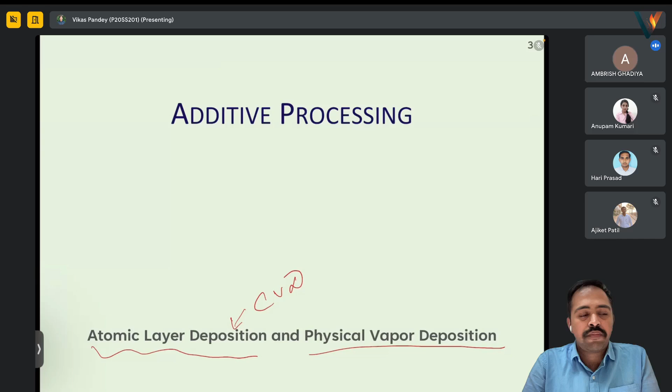Okay, yeah, I think in one of the slides we covered this part. Continue, what were the options? Let me read out. So the options were: the type of reactor used, the temperature at which the reaction is carried out, the chemical stability of the precursor, and the presence of catalytic surface within the reactor.

Yes. So my query is that the correct answer given is the temperature at which it is carried out. So if the reduction is always happening below the pyrolytic temperature, sometimes I think it always happens below the pyrolytic temperature.

So how is it dependent on temperature, because the stability is more important, right? But stability, when we are talking about CVD, we are not concerned about the stability of the chemicals. Even if a chemical is less stable, but it reacts at a certain temperature, then what will be the role of stability in that?

Stability is something we have to decide when we are choosing the precursor. But when the reaction is happening, it is asking what is the condition that will determine the reaction. The determining factor for this, whether it is reduction or pyrolysis, will depend on the activation energy. We talked about this in the previous class also, right? And activation energy in case of CVD—we said we have very limited control over the reaction in CVD, and that control is generally attained through temperature, right?

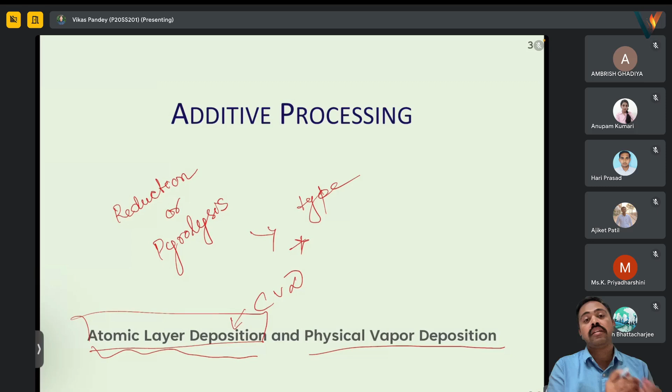That categorization is clear to everyone? Okay. So when we are talking about atomic layer deposition, if you see the equipment, it will look very much like a CVD, whenever there is temperature involved in these things. If you see the atomic layer deposition, it will look like a PVD system when you see PVD and these things, but it is CVD since reactions are taking place and then the deposition happens.

The name itself suggests that it is atomic layer deposition - that means depositing materials one atomic layer at a time. And when we are talking about atomic layer, that means it will be even lesser than a nanometer, generally in terms of angstroms, some angstroms. It is depositing one layer, one atomic layer at a time. So very precise - but as can easily be understood, if we are depositing one atomic layer by one by one, it will be very precise, very good, very smooth, conformal, but very slow.

And it operates at low temperature, unlike other CVD methods. That is why this is something quite commonly used in flexible electronics. We talked in the first class about the different kinds of substrates, and we said that plastic, PET, and these Kapton substrates have limited uses. But ALD is something where we cannot put plastic or Kapton into a furnace at 1000 or 1100 degrees Celsius - since ALD operates at a very low temperature, almost room temperature, we can even use plastic and glasses to coat them.

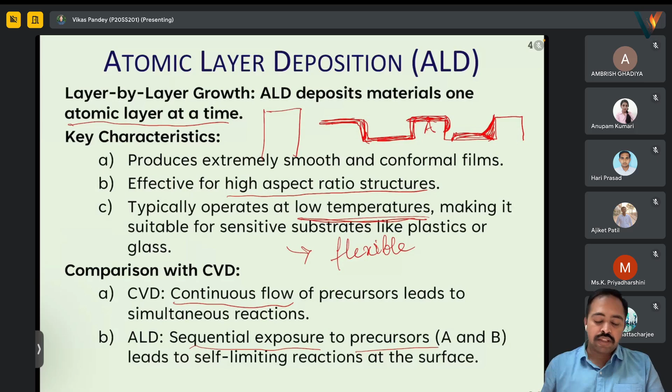Where is it typically used? It is generally used for oxides, even metals and nitrides, sulfides, and phosphides.

Since it is slow, one layer at a time, we know the atomic layer thickness. Suppose you are depositing Al2O3, you know the thickness of the Al2O3, and based on that we can very precisely calculate or know how much deposition has been done. So there is very precise control, unlike CVD where we were not able to understand the thickness, and we were not able to check it during the process. In the case of ALD, during the process itself we can check how much deposition has occurred.

Because it is very sequential, layer by layer, it is very consistent across complex surfaces. So what is the process? We have a starting surface, a clean starting surface, with some dangling bonds there.

One precursor is introduced. That precursor will bind to the dangling bonds on the surface, and then that precursor is purged out. Now we have a single layer of one reactant - that is precursor one, or reactant one. Then we put precursor two, that is reactant two. It will come, react, and then again it is purged. Now these two materials will react as per the optimal conditions we are providing, and then we purge. So one layer is formed, we leave that as it is, and then the surface is ready for the next deposition.

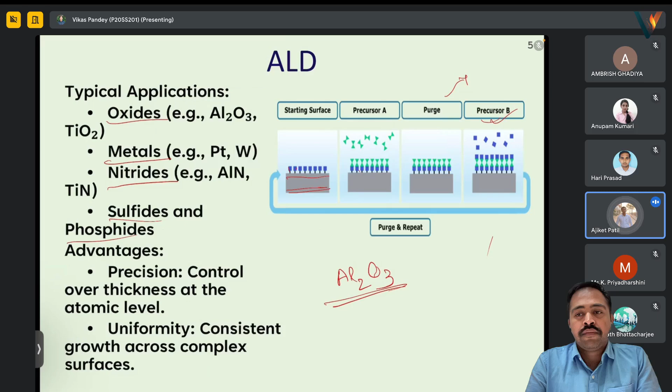Anything till here? Any questions? No, not from me. Okay, let's move forward.

The process steps are: precursor A chemisorbs. When we say chemisorb, that means it is chemically bound due to the dangling bond. You might remember from your intermediate studies what is chemisorption, what is physisorption. It is a chemical reaction based thing. It is chemisorbed onto the surface, forming a self-limiting monolayer, meaning it covers the whole surface as a monolayer, the precursor one itself.

Then excess precursor is removed. There is no reaction happening in the vicinity around it, because both of them meet only and only on the surface of the wafer that we want, nowhere else. No outside reaction is there. It is completely removed. Then precursor 2 is introduced, and that reacts with the chemisorbed A, completing the layer of the desired material. Then the extra material B is also removed, and as such we get one layer.

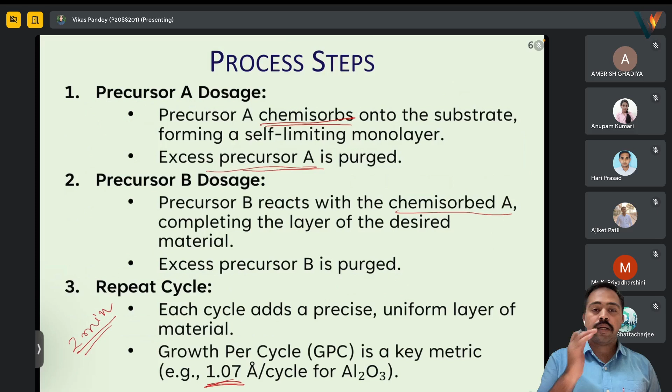Even if you compare it with other PVD depositions like thermal and sputtering, which we will be covering, even in that case this time is well enough for some good thickness, like 50, 60 at least nanometers. So this is slow, but precise.

So there are different kinds of ALD systems. The question arises, in case of CVD, what was the source of activation energy that we were using? Anyone? Temperature, right? But here we are saying it is a low temperature process.

So there must be some activation energy we must be providing for the reaction to happen, and that is through an RF plasma source in the vicinity of the wafer where deposition is to be done. The plasma being created provides the energy for this reaction to take place.

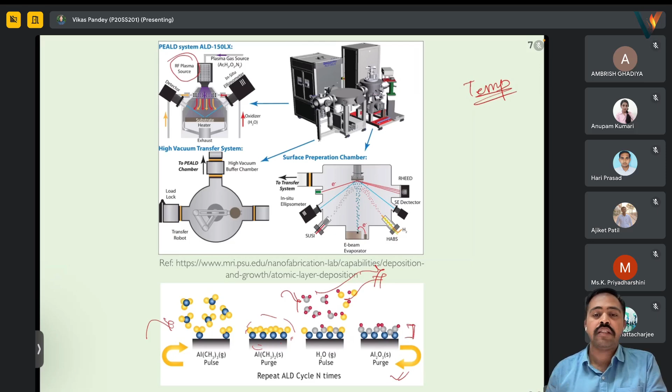Here an example of deposition of Al2O3 is shown. So Al(CH3)3 in gaseous form is inserted and it will adhere to the surface of the wafer. Then H2O is inserted after purging this, also in pulses so that complete reaction takes place. Once the complete reaction happens, along with the byproduct, the extra H2O is removed, and then we will have an Al2O3 monolayer forming on top. This is repeated multiple times to attain the number of single molecular layers we want.

So what are the things we need to optimize when working with an ALD system? One is the dose time. It is not that we put the precursor A and it gets chemisorbed at once. It must not be too short, otherwise the monolayer will not form. Also, if we put it for too long, we will be wasting time for an already slow process. So dose optimization is a very important consideration.

How long we have to put the precursor for complete chemisorption on the surface - so optimal dose is important.

Second is the purge time. If we have to remove the extra material, that time is also very critical. First, purging should be for adequate time to remove anything extra. Second problem is, if we are not removing this, what will happen? It will be like CVD - a lot of reactions will take place, and we will not get the monolayer we want, and no uniformity will be there. So both dose time and purging time are very important.

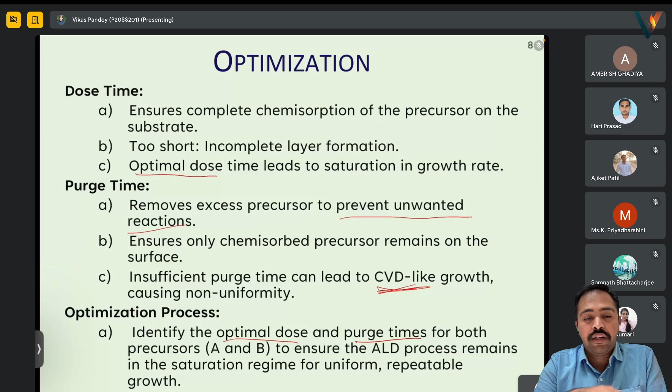So what are the advantages? This is taken from this website - they make ALD systems, so they have provided some images. You see, if it was a CVD system, the scale is actually quite low - I forgot to put the scale here, it's quite low in terms of microns, and sometimes even nano - see the coverage.

It is almost the same thickness here as what it is on the side walls, which is not possible when we are doing a CVD or PVD process in general.

It is very good in coating deep trenches and complex geometry with uniform thickness. It is independent of gas flow dynamics, so we don't have to consider whether it's turbulent, Reynolds number and everything. It is very ideal for precise thickness control and coverage, such as semiconductor devices and coating on 3D structures, like MEMS structures.

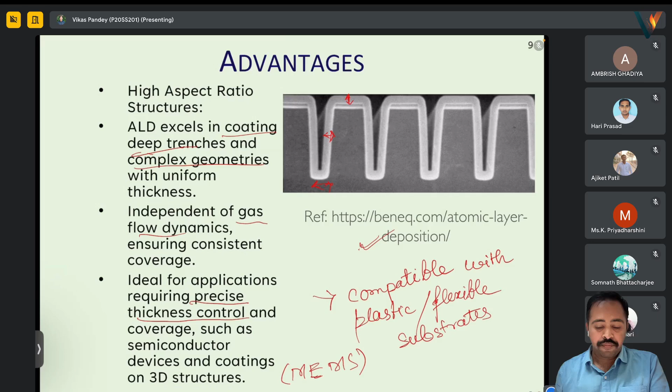Then there is one more factor that can affect our deposition, that is temperature effect. Although it is a low temperature process, meaning we are not going to very high temperatures, temperature will certainly have an effect, since it is one of the factors that facilitates the reaction. So if this whole process is done at a very low temperature, lower than the optimal temperature at which this will occur...

...precursors will condense on the substrate, and that's why they will form multiple layers, instead of, if they just get chemisorbed, forming a monolayer. But what if they condense on the surface? In that case, there will be some patches, non-uniform, CVD-like growth, as well as insufficient reaction, because if we have multiple layers and the next precursor is given in an amount sufficient to react for one layer only, some precursor A will remain unreacted.

Then what if it is done at a very high temperature? In that case, some decomposition can happen without bringing the precursor to react properly—the precursor itself might start decomposing into different elements and molecules. As well, temperature has a role on the chemisorption.

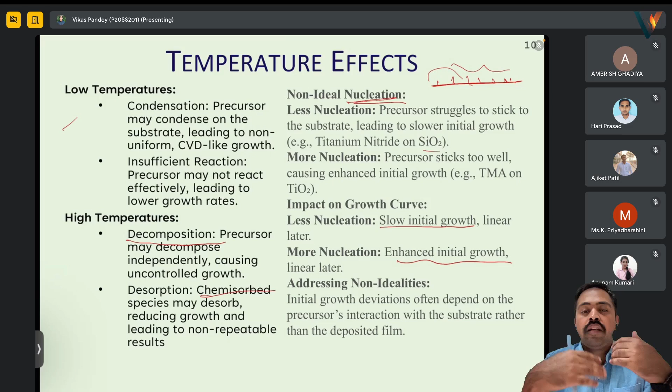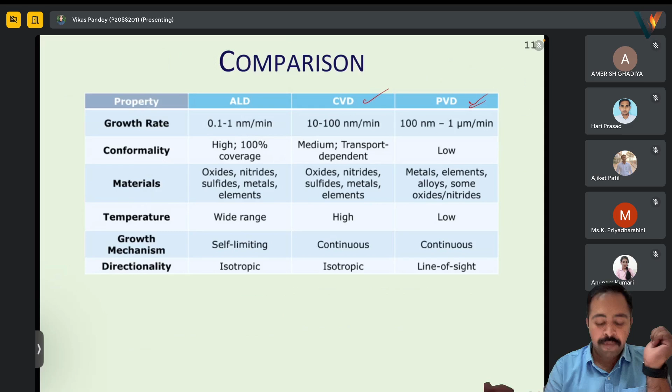So how do we compare this to CVD or PVD? CVD we have covered, PVD we will cover next. If we talk about growth rate, for ALD it is 0.1 to 1 nanometer per minute, depending on the thickness of the molecule we are talking about. Whereas for CVD, it will be 10 to 100 nanometers per minute, and for PVD, it will be 100 to 1 micrometer per minute.

Conformality: ALD has the best coverage, 100% coverage. CVD has medium coverage and it is transport dependent. PVD has low coverage.

What materials can be deposited? Oxides, nitrides, sulfides, metals, and elements - almost the same for CVD, while PVD is mostly preferred for metal elements. Alloys are unique; they can only be deposited using PVD. CVD and ALD are not suitable for alloys. As well as some dielectrics, not all, like oxides and nitrides, can be deposited using PVD.

But this is the cheapest and easiest, requiring less effort, because here we have the material and we are directly depositing it.

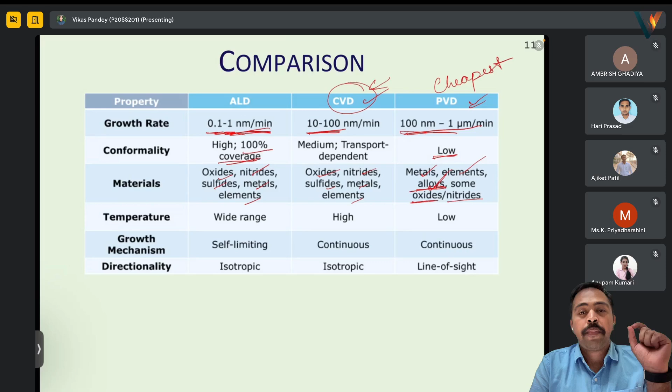In case of CVD, there are some other factors like complexities. Although it is also cheap in the sense that you just have to have a tube furnace and all things, temperature is an issue - it requires very high temperature.

In ALD, it can work in a wide range of temperatures, and generally the whole system or chamber is not heated - only the wafer area where the reaction will actually take place has to be heated, and it works fine. Even for high temperature systems, it still works at low temperature. In PVD, the advantage is low temperature.

The growth mechanism in ALD is self-limiting. In CVD it is continuous, as well as in PVD it is continuous. The direction of growth is isotropic, that's in all directions, for CVD as well. In PVD, it is line of sight.

This line-of-sight property is even used as an advantage in some processes, like covering the part where we don't want deposition to happen with a simple physical mask, such as a tungsten or steel mask. Where you don't want very small feature size, you can go for such structures in PVD, which is not possible in case of CVD.

Okay, so any questions still here? Any doubt or anything?

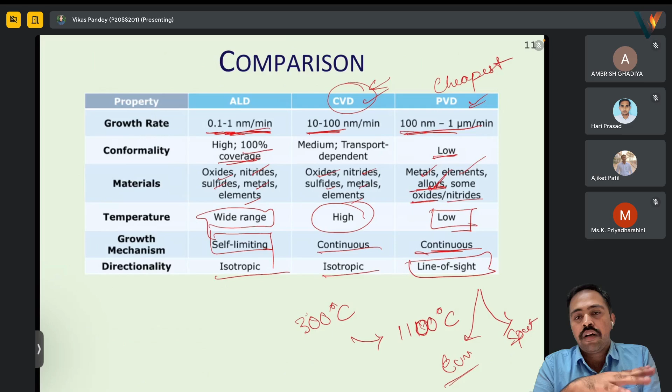In PVD we have two different sects: evaporation and sputtering. In evaporation, we are evaporating the materials, which certainly requires high temperature. In sputtering also, sometimes the material is not heated, but when depositing, the wafer is heated so that we get good adhesion, and the sputtered molecules easily adhere to the surface.

In sputtering, the wafer is heated - yes, sometimes, not always, not all times.

Any other questions from anyone? Yes.

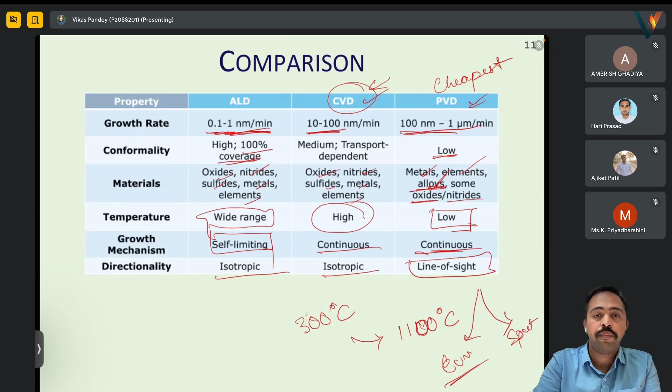Okay, so let's move forward to our next topic, which is physical vapor deposition.

As we have discussed earlier also, in chemical vapor deposition the exact material we want is not available - what is available is two different reactants that react and form the material we want to deposit. But in case of physical vapor deposition, we start with the solid material source.

We convert it into vapor and then deposit it onto the substrate. So this is, in a crude sense, a simple change of phase from solid to vapor and then again to solid, or thin film.

First, we have to have the material pre-prepared. It can be prepared by any chemical process, and then we have to have it with us. When we talk about microfabrication, we've discussed the purity of materials and chemicals—that is very important. Whatever material we start with, we have to start with a good quality starting material. We cannot call it a precursor. In case of sputtering, we mostly call it a target. In case of thermal, we are directly putting metals.

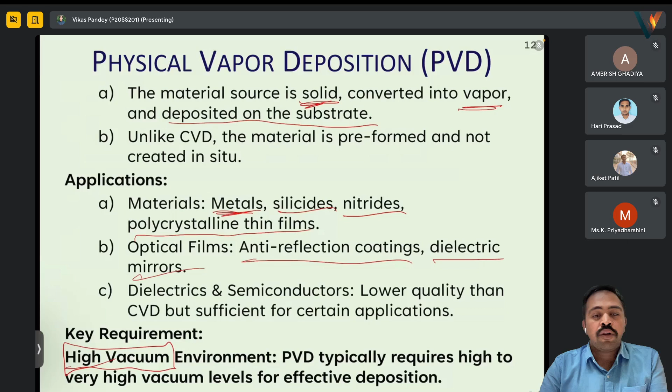But one key parameter in all PVD systems is high vacuum. High vacuum environment is used for effective deposition. When we talk about vacuum, throughout the world we have different units of pressure. Whenever you encounter systems, you will hear different kinds of pressure units. One atmospheric pressure is 760 torr, equivalent to 1000 millibar or 10 to the power 5 Pascal, and these are the normal pressure range, one atmospheric pressure range.

When we talk about vacuum, that is having lower pressure, air is removed from our system. A low vacuum, or the simplest form of vacuum, is around 1 millibar, where we have internal pressure in our system or chamber around 1 millibar—that is considered a low vacuum. Then we have medium vacuum, that is 10 to the power minus 3 to 10 to the power minus 1 millibar.

So can anyone tell, will 10 to the power minus 1 be a stronger vacuum, or 10 to the power minus 3? 10 raised to minus 3 will be more vacuum, because it is smaller than 10 raised to minus 1. Smaller means less air inside, so we have less pressure being exerted. And to sustain this lower pressure, since outside pressure is too high for it to sustain, the chambers have to be designed to sustain such difference in pressure outside and inside. That's why PVD systems generally have very thick steel structures and multiple structures to sustain such vacuums.

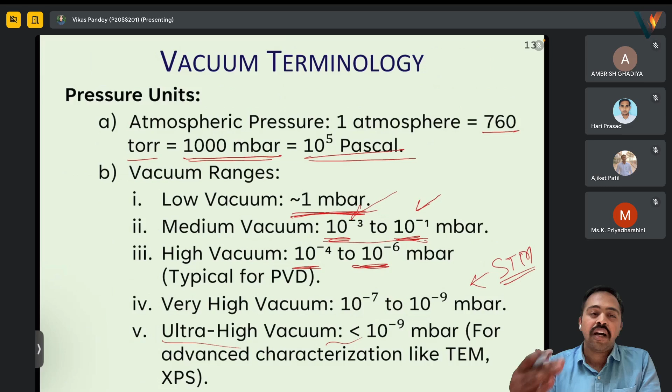So these are the pressures we saw, but how are these pressures attained? If you encounter any such PVD system, you'll spend most of the time making the vacuum. The real deposition or real work is less; the maximum time is utilized to create such high vacuums. So how are these made? These are made using some vacuum pumps.

Starting with a simple oil-sealed mechanical pump, which operates in the low to medium vacuum range, going up to 10 to the power minus 3 millibar. Then we have turbomolecular pumps and cryo pumps—we will not go deep into their working; if someone is interested, they have a lot of different working principles. A cryo pump works with liquid nitrogen where it freezes everything, and these are used to achieve high vacuum.

So, but mostly it is like that. Okay, we will anyway cover that. Then we have ion sputter pump or titanium sublimation pump that is used for ultra high vacuum.

There are different kinds of pumps used, and generally for these two pumps to work, it is not that you start with an ion sputter pump and directly create a vacuum of 10 to the power minus 9. It is generally done that larger molecules, or at first a large amount of gases, are removed by some crude pumps like the oil sealed mechanical pump. And once we have reached 10 to the power minus 2 range or something like that, then we go for the turbomolecular pump, and then it reaches 10 to the power minus 6, minus 7 range, and then ion sputter pumps are used to go to minus 9, minus 10, to the power minus 11 millibar sometimes.

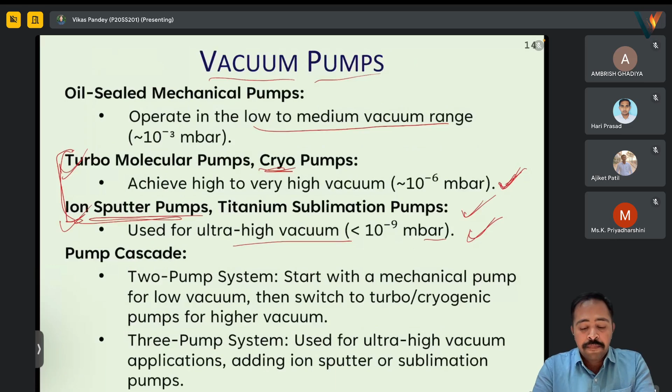So next, there are two ways we can do PVD. One, and the simplest, is evaporation. It's simple. We have a material, suppose that you are going to deposit aluminum. You heat it to such a temperature that it evaporates, and you deposit it over a wafer. So it evaporates and deposits.

Okay, and why is it done in a vacuum chamber, if it is simply heat it and deposit it? The thing is that so that there is no collision of material molecules. This straight line of sight deposition can occur.

Okay, then we have seen that high vacuum is required. It has two different reasons. One is there should be no chemical reaction, because the material is already there. But since we are evaporating at a high temperature, some reaction might happen. If there is oxygen, there is nitrogen, something like aluminum oxide or aluminum nitride might form. We don't want that. We want aluminum to be deposited as such. So for that, we want to remove all contaminants, all chemical contaminants. That includes the air. That is one of the reasons that we do this.

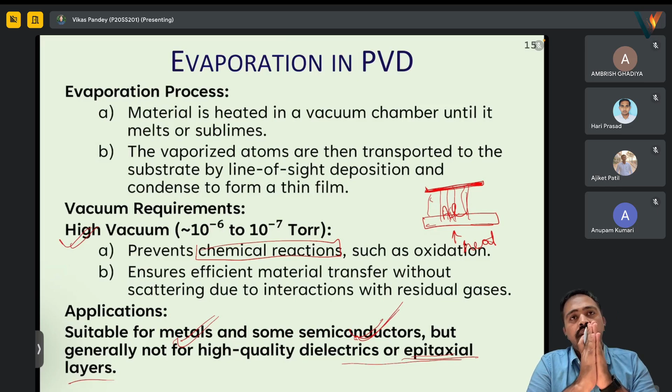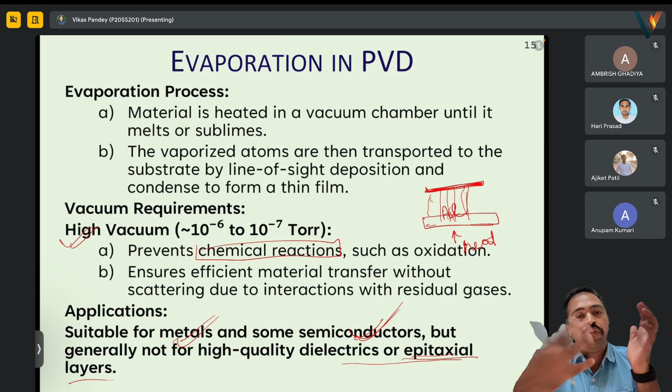But generally we don't get high quality dielectric, or epitaxy layers are not possible here, because there is very least chance that some epitaxial growth can occur, and even if it occurs, that happening throughout the wafer is very rare. So in this concept, one very important thing is mean free path. Anyone aware of this term? I think most of us have studied this, right? Anyone who knows what mean free path is?

Yeah, it's the path the electron travels before it goes to collision. In this case, we are talking about any kind of molecule, any kind of molecular species. So it is the average distance a molecule will travel without getting collided, in simple terms.

We want this mean free path to be large. Why large? Because suppose this is our material kept in a crucible or something, and we have this wafer, and they are separated with at least some separation. Otherwise it will just stick to it and will not get its film. We generally want its film, and that also uniform. So if we just dip inside it, it will not work.

So we will need some distance, say 10 centimeters. In general, we want that the mean free path of the molecules that will evaporate from here should be more than 10 centimeters. Then only this deposition will occur. Otherwise, they will collide with each other and we'll see very non-uniform patches.

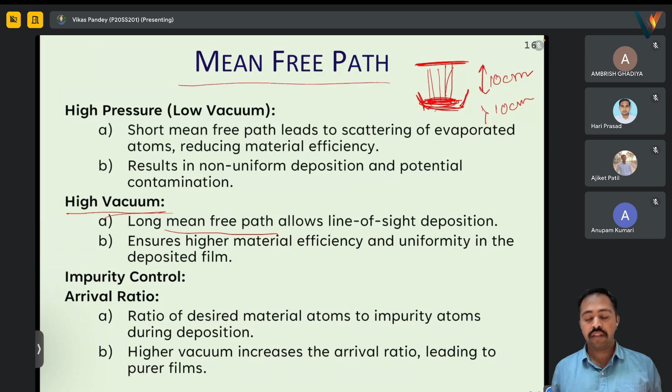As well as contamination will occur due to the collision of some other species. That's why we go for high vacuum. That means having longer mean free path and line of sight deposition, as well as efficiency and uniformity in the deposited film.

And the next thing is impurity control. Whenever we are talking about this field itself, we have to deal with it with a lot of purity. Everything should be pure, clean, and such. Small contamination can have such roles that we cannot even imagine what electronic effect it might create.

What if a chip you are making is being used, say, on a space station, and that fails? Even to correct that, like just due to some contamination, the whole thing fails, and if it fails, a person has to go and repair it, and that will take years for that person to be stuck. Like at present, Sunita Williams is there, stuck right there. So even a single contamination can have a long-term effect on our devices.

That's why it has to be controlled at each and every point. So contamination control, increasing the mean free path, and quality of material as well as uniformity will increase if we are going for high vacuum.

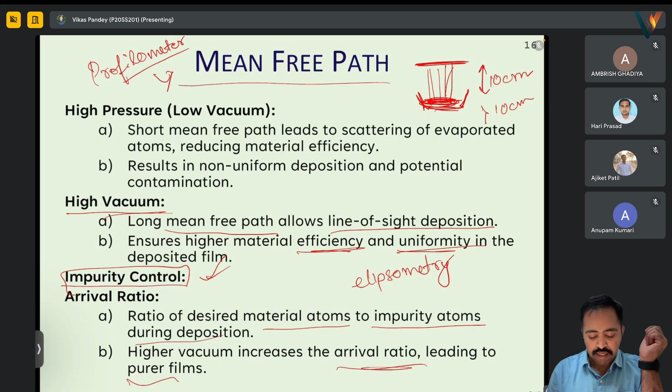Now the next concept is arrival ratio. That is the ratio of desired material atoms to impure atoms during deposition. Whatever we may try, there will be some impurity that comes. So this arrival ratio, we have to get very high, almost like 0.999. If we take the perfect arrival ratio, material to impurity, impurity should be 0, so it should tend to infinity, very, very large. This ratio should be as large as possible, that is, desired material very high compared to impure material. So higher vacuum increases this arrival ratio, and thus we get purer films.

Another factor is evaporation rate. This depends on the vapor pressure of the material. Here we are talking about the vapor pressure of a solid once it gets heated.

Heating can be done using different methods. When we are talking about evaporation, the most common method is resistive heating. We have a small boat-like, very small strip kind of structure with a small central crucible - this is the side view I am talking about. This is generally made of tungsten.

We put our material here, and we connect it to a current source outside through a transformer, giving high current - really high current, like 100 to 120 amperes. In our houses, whatever appliance we use, 32 ampere is the highest rated switch we use, we don't go above it, and even that rarely happens. But here, 100 to 120 is the normal range, sometimes we even go to 180, 200 amperes.

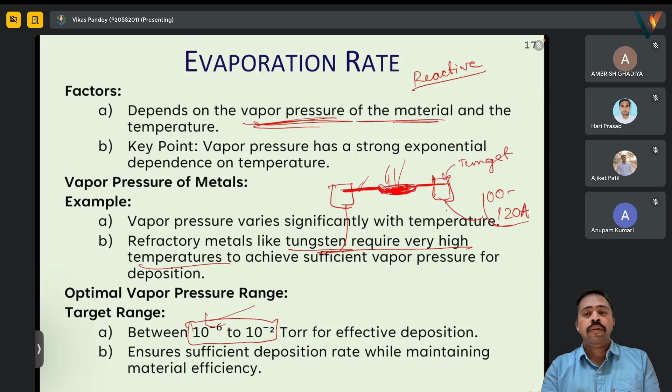So what is the advantage in this whole process is that... are you getting it, everyone? Did you say as the material gets deposited, the vacuum will increase? No, it will degrade, decrease.

Suppose we are working at 5 into 10 to the power minus 6 millibar. Once we start, we have not started any deposition yet, we are just making the vacuum. Now we have reached this pressure. If we start melting aluminum, aluminum will exert some vapor pressure in the chamber. So you will observe that it will actually degrade, say it will reach 8 into 10 to the power minus 6 millibar.

So we have to maintain a good vapor pressure for good deposition, as well as good vacuum for a longer mean free path. It should not happen that once we start depositing, it reaches to 2 into 10 to the power minus 1 millibar. In that case, the vapor pressure is good, but there will be a lot of collision and the deposition might not happen. So we have to take care that there is a balance between both of these.

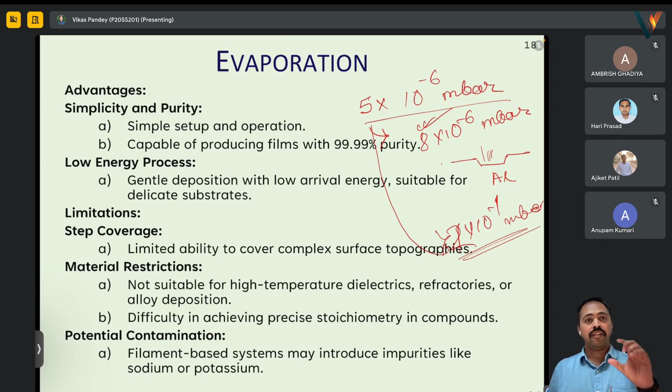Yes, this is something we generally think. The thing is, the chamber we are talking about is somewhat 50 centimeter by 50 centimeter by 50 centimeter around. And the deposition is happening at a distance of, say, 5 to 6 centimeters from the wafer. So the molecules don't get scattered adequately, they generally get deposited. They are very heavy molecules and they generally get deposited. So some material is certainly wasted, some goes to the outer walls and gets out, but most of the material gets deposited.

Yes, okay, thank you. Thank you, got it? Yes. Any other questions?

So the advantage here is that it is simple and it can be used to achieve very pure materials, because there is no reaction taking place. If you already have a pure material, you will get a pure film, if you take care of some other small things like maintaining good vacuum and these things.

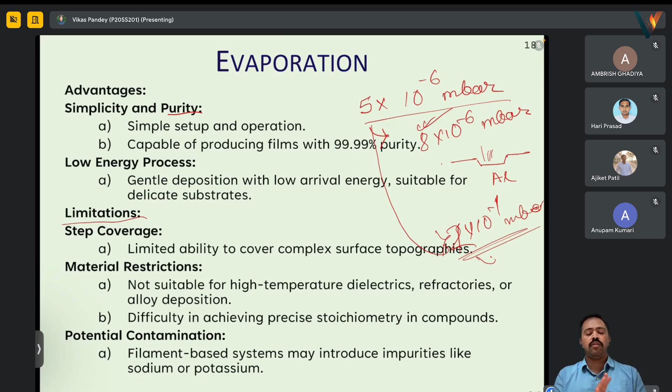Sometimes even laser is used to heat this, instead of the resistive heating, laser is also used in some cases, but mostly and very commonly, this is one of the most common deposition techniques.

Then comes the second part, that is sputtering in PVD. To understand sputtering, let's not see this in a very complex way.

It is simply like if we have a pool of mud, and we throw small stones, pebbles on it, and a person is standing there. If some kids come and throw stones, not on the person but into the mud, what will happen?

Any ideas? Yes, reflections will come, some of it will sprinkle out some mud over the person.

What is getting involved is that this person is throwing stones, and stones remain here and mud comes over the person. This is the simple method of how sputtering works.

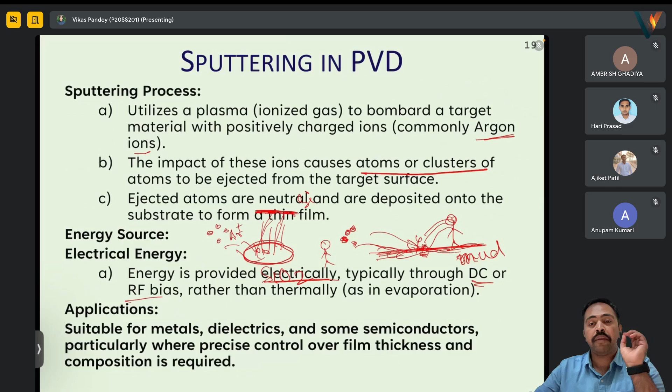In CVD, we were giving the energy through heaters, pure temperature. In case of thermal evaporation, we are mostly using current, giving energy still in form of temperature. But here the energy is not provided in form of temperature, but is provided electrically, either through DC or RF, to form the plasma, because plasma or the ionic form of argon plays the role here in the deposition.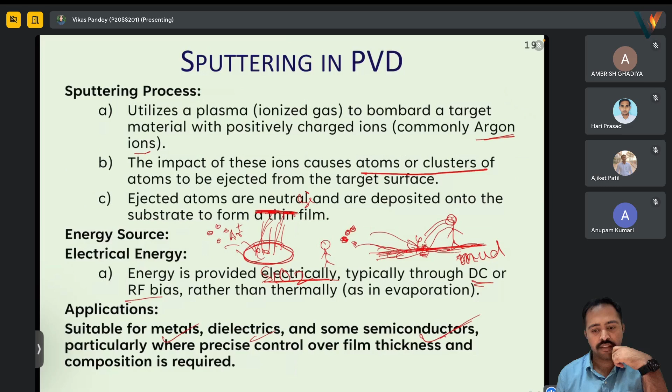This is suitable for metal, dielectric, and some semiconductors, where film thickness control is required. In such cases it can be used. So here are some common ways in which sputtering is done. The basic one, like I said, the sputtering gas is mostly argon.

Okay, this is the target. This whole system will be connected to negative and positive. As such, these ions will move towards the negative. They are positively ionized, will move towards the target, hit it, and take out the material towards the positive ion. In this whole process, this material will not get ionized, it will just change phase, and move with the plasma towards the substrate.

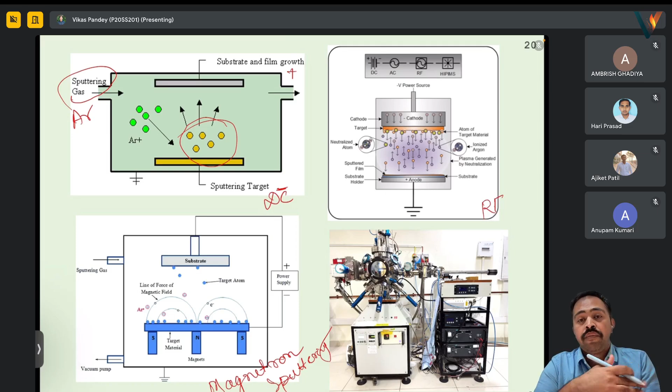Simple. Then a modification is there where we are saying magnetron sputtering. In this case, a magnetic field is added along with this, and this enhances the sputtering. This one is a basic DC system, this is a magnetron system, and another one is an RF system where radio frequency of a certain frequency is maintained to sustain the plasma, especially useful where we have dielectric, non-metallic materials.

Below I have shown one of the systems that we use in our lab. If you see this, this area is where deposition occurs. This other one is the load lock chamber where we are putting the sample, because we cannot break the vacuum every time, so we have a small chamber attached to it. We are putting the wafer and other substrates there, then moving through this magnetically controlled arm into the vacuum chamber. And here, these blue parts you see are connected inside to the target.

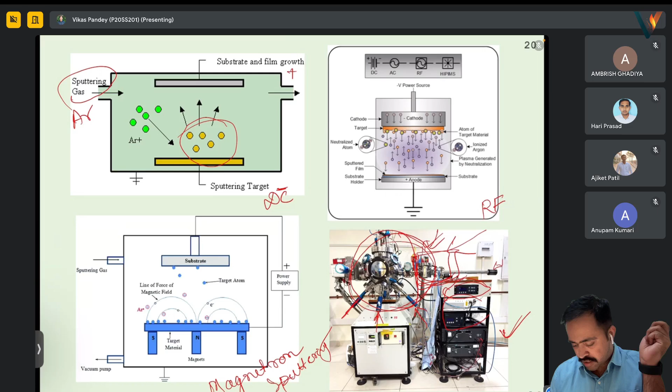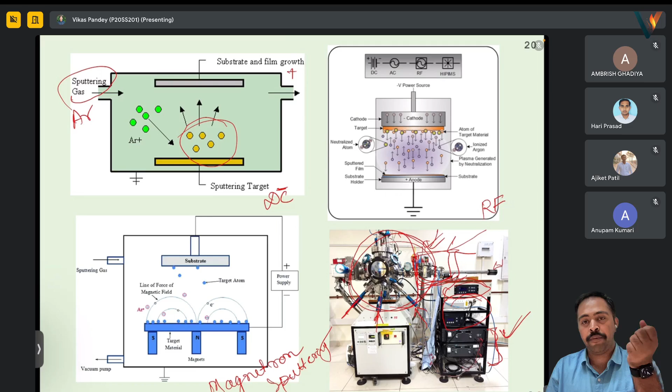We have different targets, like copper, aluminum, as well as SiO2, silicon nitride. There can be others, and they are powered through. We have both systems, DC as well as RF. The upper one is the RF system, and below we have a DC system, according to our use. We also call this a gun. They have a magnetic field, so what we have is a combination of magnetron and RF sputtering. We can use both magnetron as well as RF sputtering for our purpose.

Before going to magnetron sputtering, let's talk about the yield. What is the sputtering yield? It is the ratio of ejected target atoms to the incoming argon ion, and it depends on the type of inert gas being used - argon, and sometimes neon is also used - and the target material. So it is, in a sense, a ratio.

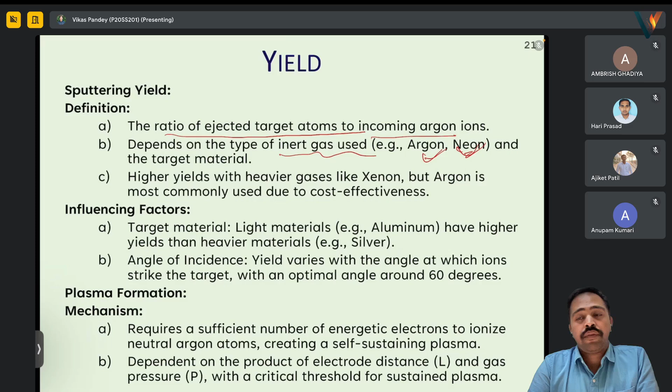What are the factors that define our yield? One is target material - if we have some lighter material like aluminum, we'll have higher yield. If we have heavier material like silver or gold, we will get lower yield.

Then there is another thing, the angle of incidence. We saw that although it looked like the wafer and target are kept parallel, it is not necessary to be kept like this, and the ions that come will not hit like this - they might be hitting at some angle. This angle of incidence will also affect our yield, and 60 degrees is considered the optimal yield angle. That's why in the system you were seeing, we don't have it straight, we have an angle between the substrate and the target - not parallel, not 180 degrees to each other. They are at some angle, in our case between 45 to 50 degrees, slanted at some angle.

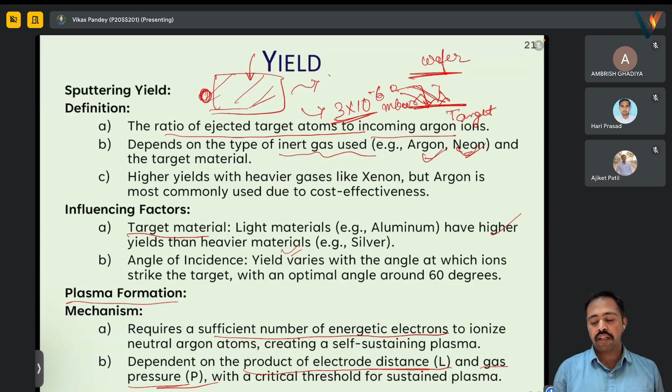When we insert the argon gas, the pressure will at first reach, suppose, 3 into 10 to the power minus 6 millibar. Then, once we have reached this, the pump will remain on, and we will insert some amount of gas. We will close the outlet to decrease it, and sustain a pressure of say 4 into 10 to the power minus 2 millibar, or minus 3 millibar.

Why is this so? Because we need enough gas pressure for the ionization and for the plasma to happen. Sometimes for specific cases, this can happen at minus 2 range, or even sometimes the plasma will form in minus 3 range, depending on our purpose. The plasma formation is dependent on the product of electrode distance - that is positive, negative, generally target and substrate - and the gas pressure.

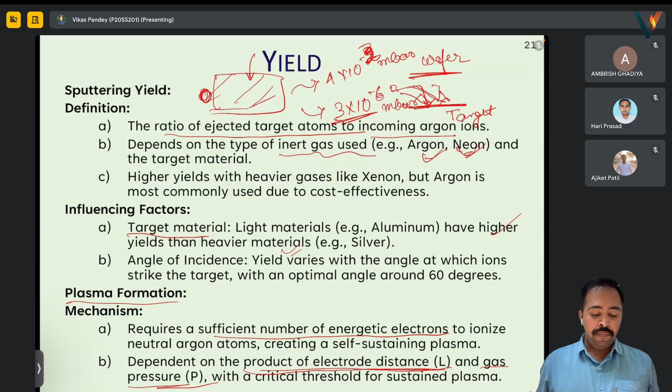Then, to increase the yield, we have something called magnetron sputtering. It uses very strong magnets - I think one magnet I had once got damaged after being used for long, and it's too strong to remove. So very strong neodymium magnets are used to confine electrons close to the target, and as such the plasma will be more towards the target, so a lot of ions will easily hit the target.

This also ensures that we are not putting too much gas to increase the ion bombardment. Otherwise, to increase the amount of ions hitting the target we would have to increase the gas pressure, but we don't want to do that because after a limit there will be a lot of collisions. So to counter that and maintain the mean free path, we have magnetron sputtering, in which magnetic field is used to assist the plasma and increase the plasma density around the target, enhancing the sputtering.

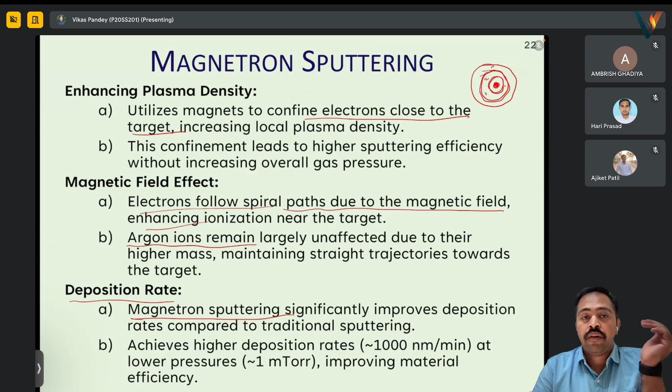Then there is another way. DC or magnetron sputtering is mostly used for metal, because the target itself is an electrode. But what if we have to deposit some non-conductive targets like oxides or nitrides? Charge will build up due to the capacitive effect, so an AC bias of 13.5 megahertz is used to create the plasma.

Since the field is fluctuating - positive, negative, AC - charge accumulation on the target will not happen. There are some frequency considerations: at low frequency, both ions and electrons react to the oscillating voltage, and at higher frequencies above 1 megahertz, only electrons respond to controlled sputtering - ions have no role here, only electrons are there. That's why a frequency higher than 1 megahertz is taken for RF sputtering.

With RF sputtering, the advantage is that it can be used for a wide range of materials, even metals and non-metals, without surface charging. But if we compare RF sputtering and DC sputtering or DC magnetron sputtering, the quality of film for a metal, especially in case of DC sputtering, is better compared to RF sputtering.

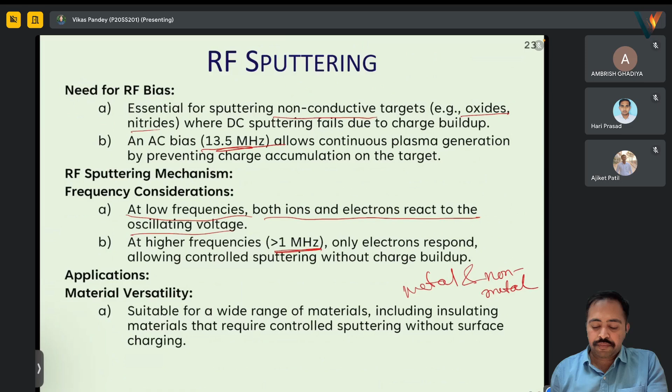So why are we using RF sputtering? First, for insulating targets, as well as to prevent charge buildup.

Now, when we have an oscillating field, electrons are small enough to follow these oscillations, but argon is too inert and too large to follow this oscillation along with the changing frequency. Due to this, a DC potential is formed in the plasma. Even though AC is used, a DC potential is induced in the plasma due to the nature of argon not moving along with the changing AC frequency.

There's also one problem: suppose we are going to deposit over a 4-inch wafer, we cannot have a 4-inch target of say gold, that will be too costly. So we are using 1-inch or 2-inch, so there is a difference.

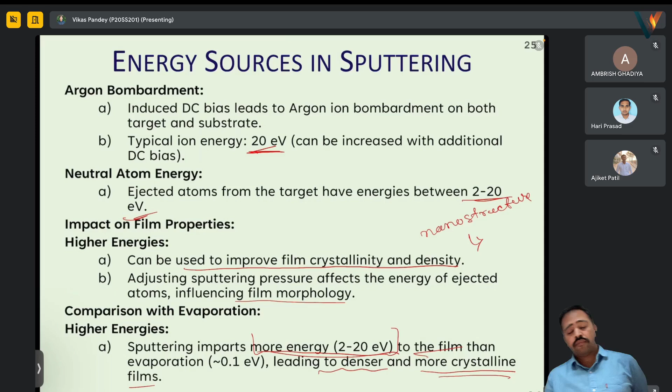Sometimes, if you are depositing silicon nitride or something, while we are talking about sputtering PVD, sometimes we have to put some reactive gases into the sputtering chamber. So it is like PVD, but a bit of chemical reaction is also taking place. This is called reactive sputtering, and this is sometimes done for silicon nitride, Si3N4.

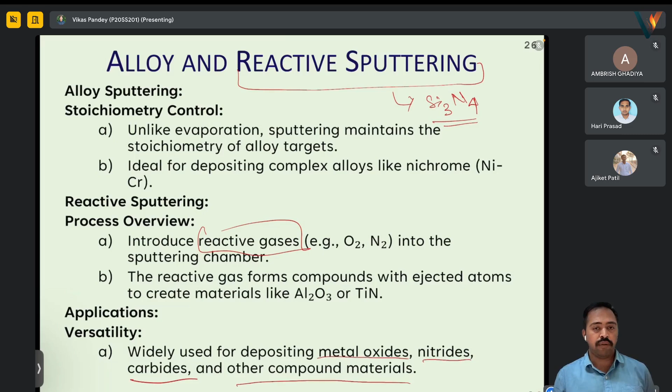Like we are introducing nitrogen along with argon for the nitridation of our silicon oxide, and there the reaction is also taking place. This is called reactive sputtering. Even alloys can be deposited, like nichrome, using sputtering. It has a wide application for depositing metal oxides, nitrides, carbides, and other compound materials.

So the advantage is, uh, yeah. Am I audible? Yes, yes, yeah, everyone getting it right?

So the advantage with sputtering is that it allows for uniform deposition over large areas, unlike evaporation, where the deposition is not uniform. In sputtering, if we rotate the substrate perfectly, the thickness is almost the same throughout the wafer. The change is very less.

It has better alloy and stoichiometry control. So alloys maintain whatever is the composition of the target; the same composition will be on the deposited film after deposition. Because it is low temperature, not as much temperature is given as in evaporation. There, if we were mixing an alloy, it might become something else when getting deposited.

As well, in this whole process, there is plasma which actually cleans the surface before starting. We have seen that plasma cleaning is a process where wafers are cleaned, so before the start of deposition itself, plasma cleaning in a way occurs, and in-situ cleanup happens. It has better step coverage, not like ALD, but better than evaporation.

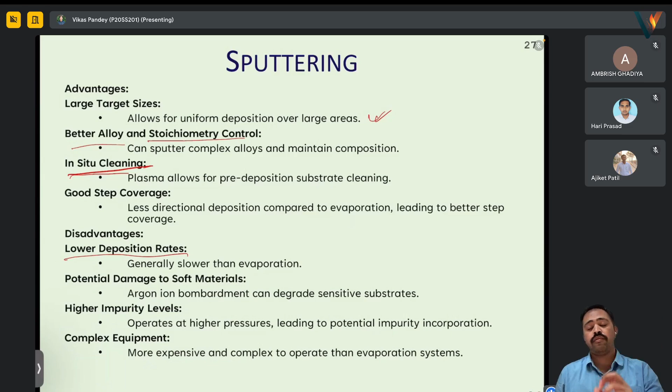Since it is carrying a lot of energy, it can potentially create damage to soft materials. It also has a higher impurity level. Although we are going to lower pressures, that is very high vacuum, the real operation occurs at a higher pressure, say 10 to the power minus 2, minus 3 range. That's why impurity levels can be higher compared to an evaporated sample or thin film.

The equipment is much more complex compared to thermal evaporation. In thermal evaporation, it is simply a transformer to step up the current, and we have a boat and pressure systems like vacuum systems. Whereas in sputtering, we have DC, RF, magnetron, a lot of complex things that have to be controlled very precisely. Along with that, the whole system has to be properly cooled, because this whole process generates a lot of heat.

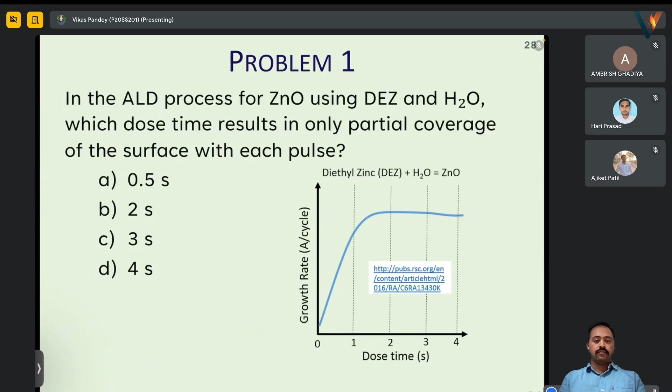Continuous flow of water or coolant is to be done, and such things make the equipment complex, very complex for operation. So any questions still here? No, clear, no, thank you.

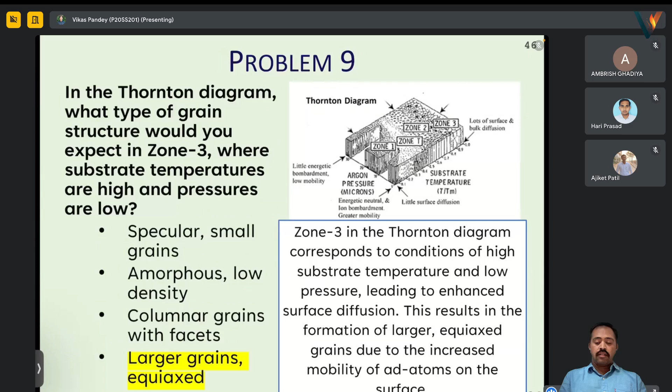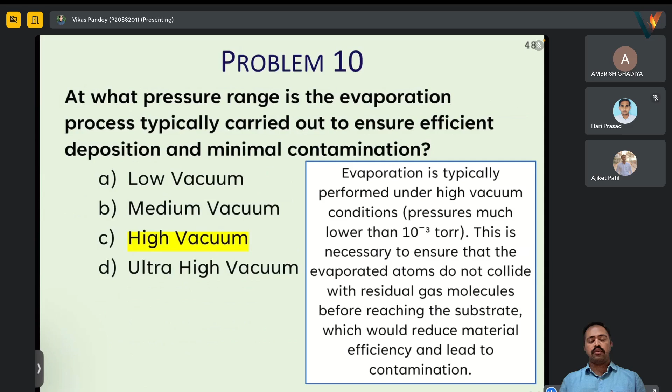No, thank you. No. Thank you very much. Thank you, it was really great lecture. Thank you. Thank you, everyone. Thank you.